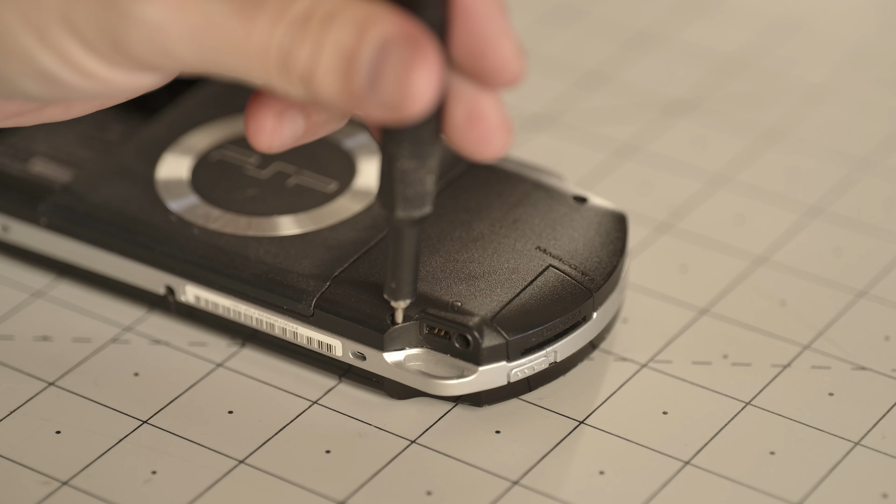The teardown is usually my favorite part of the builds, and this PSP is no exception. But I wasn't kidding when I said it's hard to find these things in really good shape. There are a ton of them for sale on eBay in lots of different models because they made a bunch of them over the years, but people kind of abuse these things.

I mean, think about it. Because of the form factor, people threw it in their pockets, threw it in their backpack with their keys, so you're never going to find a pristine screen unless you buy an aftermarket one, and you're going to probably find cracks in the case, and a lot of these aren't working.

When I start a project like this, I really don't know exactly what I'm going to do with it. Now, I have an end goal in mind, but how I get there and what it ends up looking like is still a really big unknown at this stage.

That's why you're going to see me taking a good amount of time to do things like preserve labels, categorize screws, and I even use the video footage that I shoot in order to understand how to deconstruct it so that I can put it back together again too.

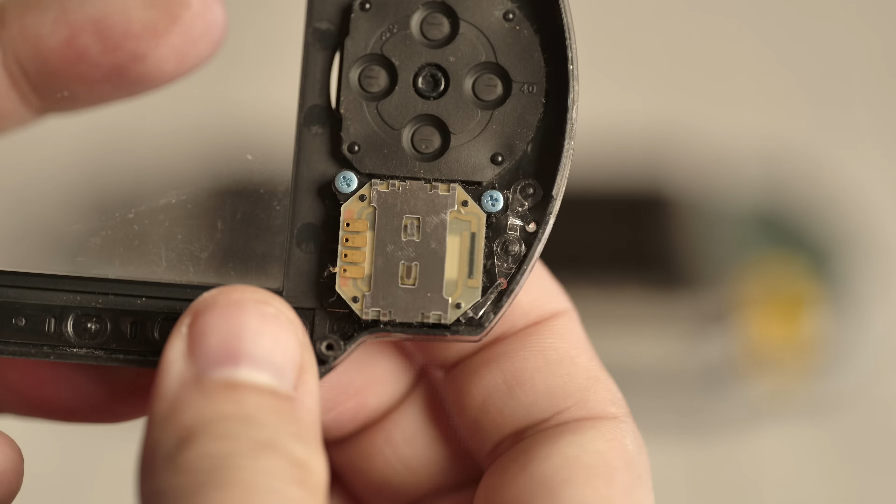I'm constantly referencing old footage. When you're tearing down something, if you think about it as not just a means to an end, then it becomes more of an archaeological dig almost.

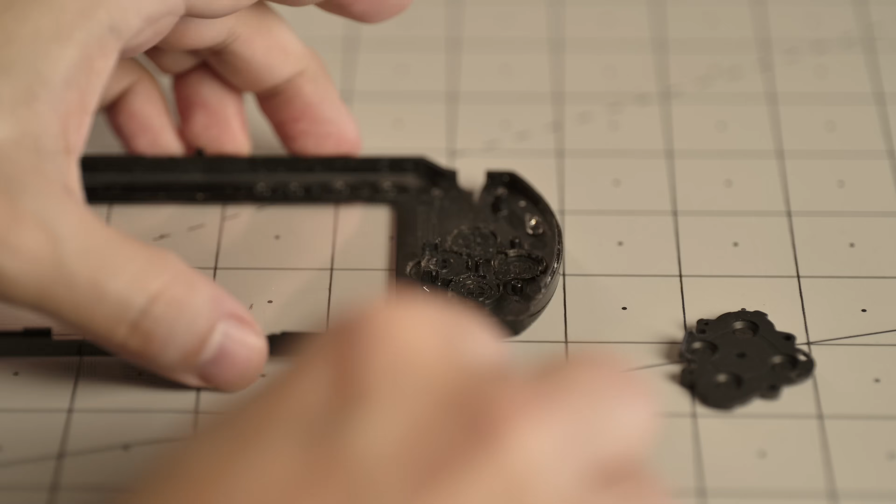You're really learning about how the industrial designers thought about how to construct it, put it back together, what their constraints were, what components to use, where to place the components, and you kind of get a cool look or a window into their mind when they were building the product in the first place.

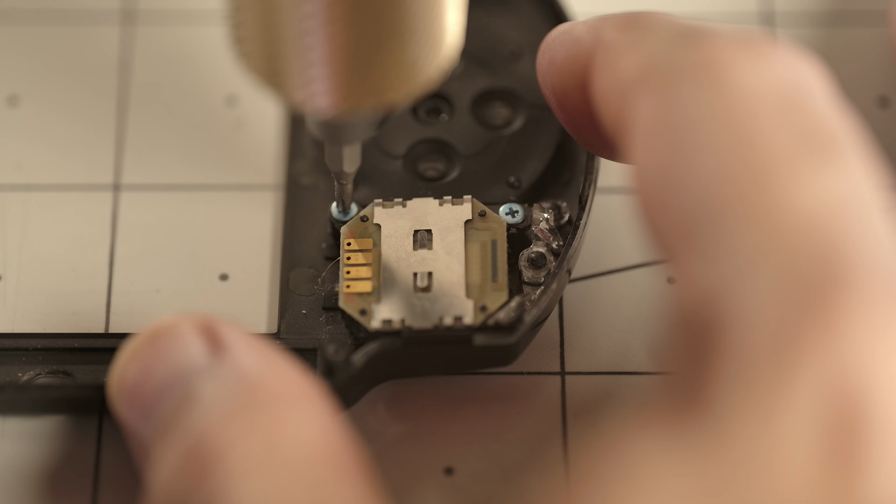As I'm working through this, I'm remembering that Sony was known for miniaturization. They had a history of miniaturizing products like radios and cassette decks back in the 80s and 90s, and this thing absolutely shows their chops.

One of the parts of the process is to make sure that I'm noting down all of the things that are broken or possibly missing. So I'm looking for pieces of plastic that it looks like something may have split off from, or some rails or posts.

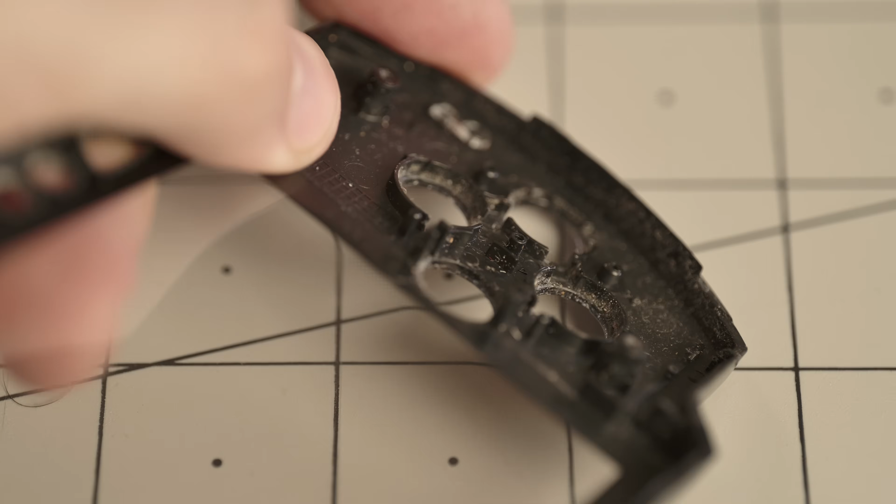Now, some of these it might not matter based on what I'm going to do and how I'm going to rebuild it, but some of it might, because it may be a pin that is holding down something that needs to be held down that maybe broke off over time. So I'm really taking my time, looking through all of the surfaces, all of the parts and pieces, and just being really methodical about it.

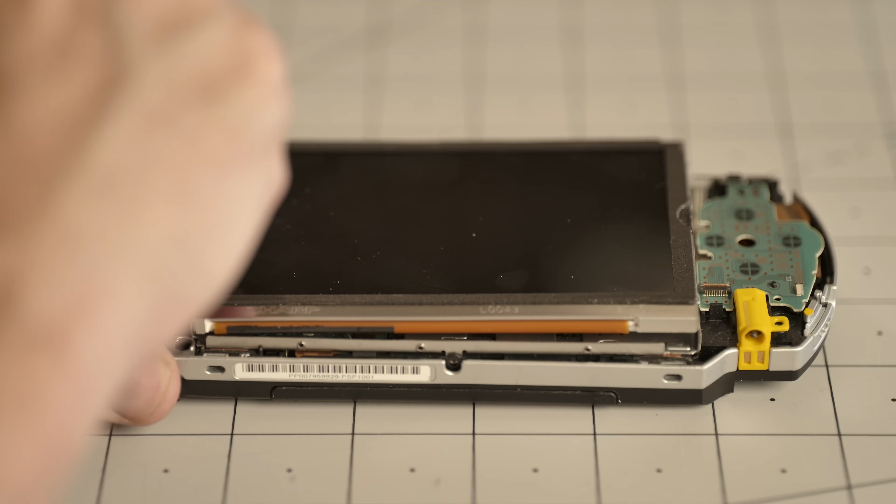Another thing that Sony was notorious for was not really designing for consistency in components as a leading principle. That's why you're going to find so many different connector types and screw types all over this thing.

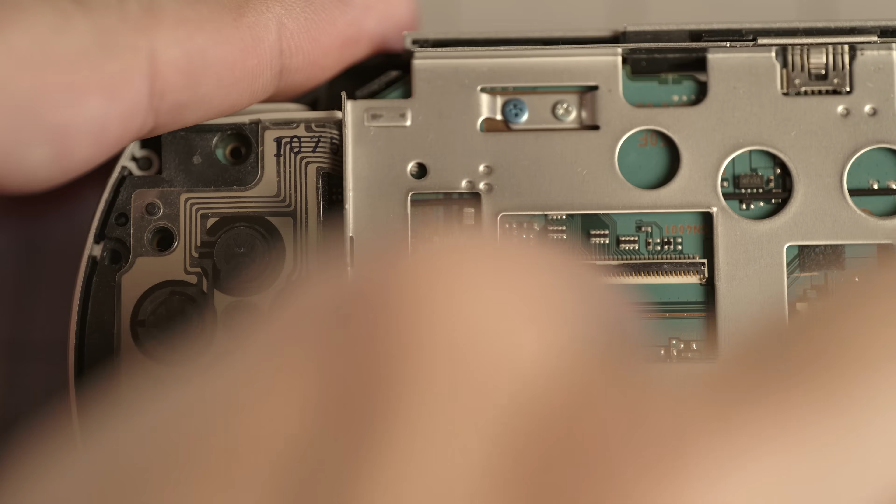This is just a guess, but I assume Sony's design philosophy was more about the right tool for the right job, rather than trying to get economies of scale by saying we need 5,000 or 500,000 of this one screw, so let's use it everywhere. It was all about what is right for the product at this point in order to get the best outcome.

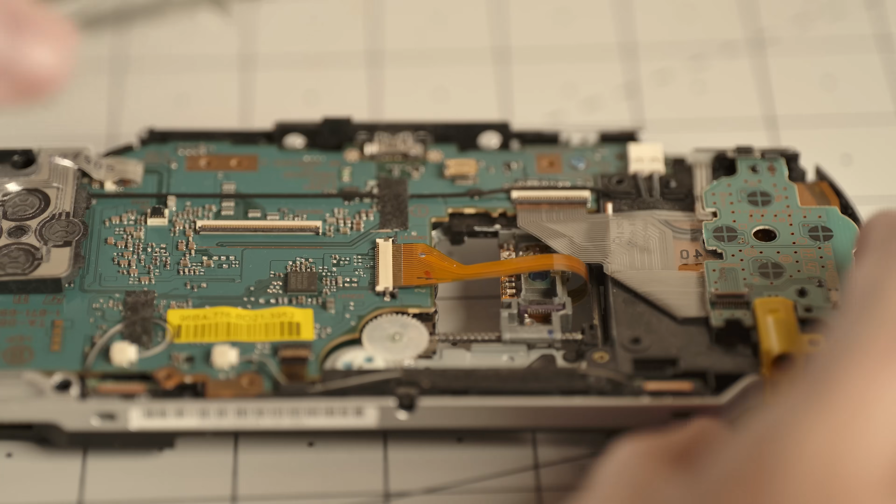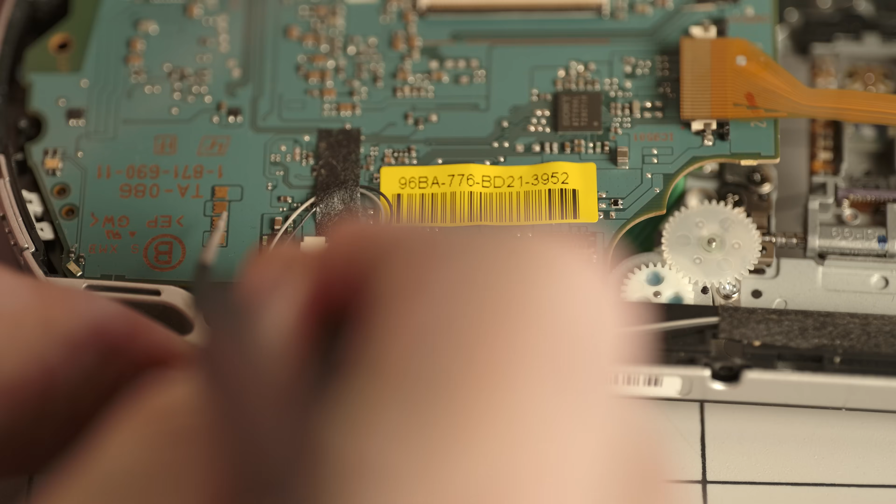What that also translates to for a company like Sony is proprietary parts, like that power connector we just saw. I'm going to want to standardize that by using something like a USB-C connector, so that nobody has to go on eBay or fish around for a power adapter that hasn't been made in decades.

As I get to the end of this process, it's really easy to get overwhelmed by the sheer number of components involved, but I need to remind myself that taking things step by step, one thing at a time, going back and referencing, it's all doable.

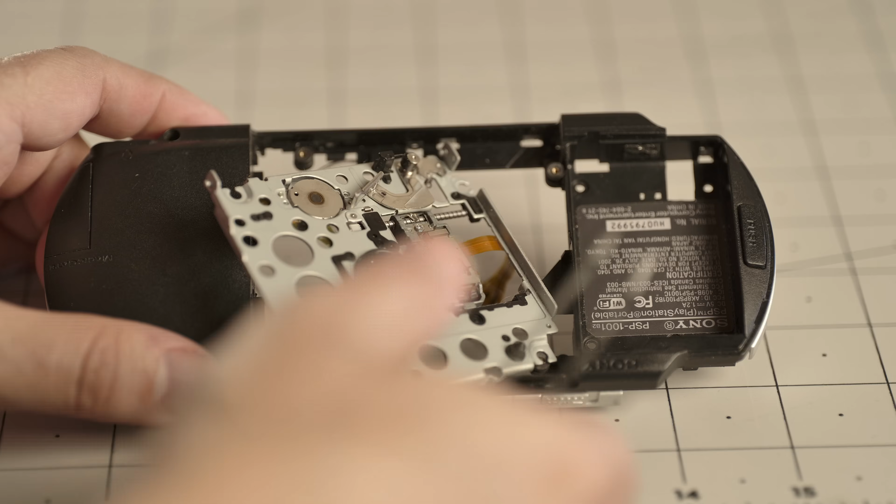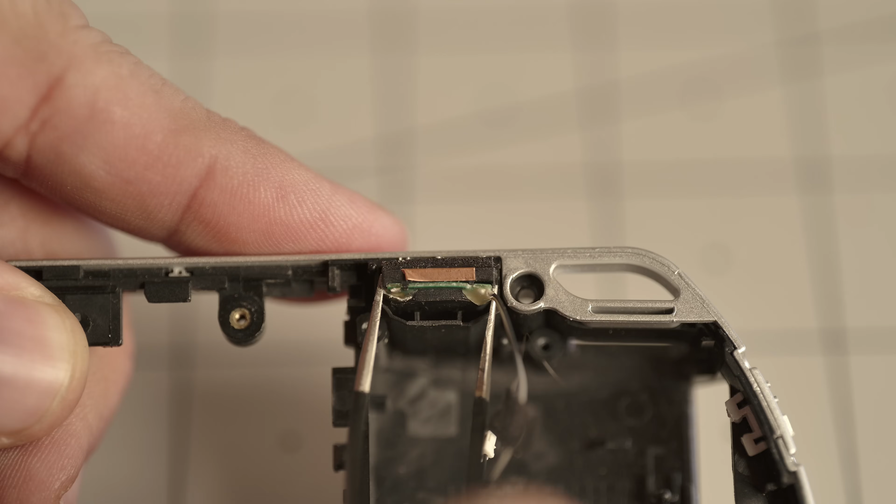The other thing to remember is that these are consumer-grade electronics. They were designed to be beat up, thrown around, and really put through the paces. I'm not going to design something like that. I'm designing something that is completely functional, but is more of a showpiece, more of a homage to the design. So there's a lot I'll be able to leave off by the end of it.

So with all the components taken apart, categorized, and put away, it's time to get to modeling.

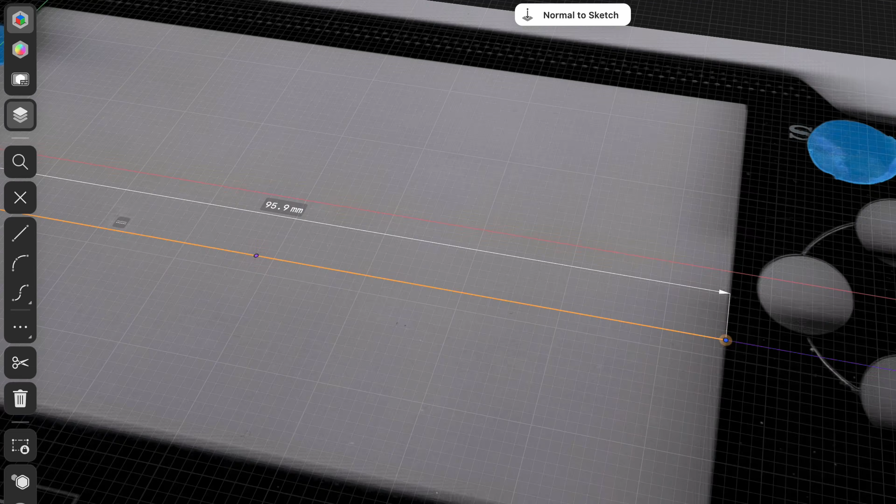Some might disagree, but I like to start off with photos and image scans. Now, a lot of you have been yelling at me for using 3D scanners for a long time, and we're actually going to get to that. I'm going to show that process in this video, but not just yet, and you'll soon find out why.

The very first thing I do is try to make basic shapes, to get an outline of the product, or at least parts of it, in order to understand the geometries of the overall thing I'm working with.

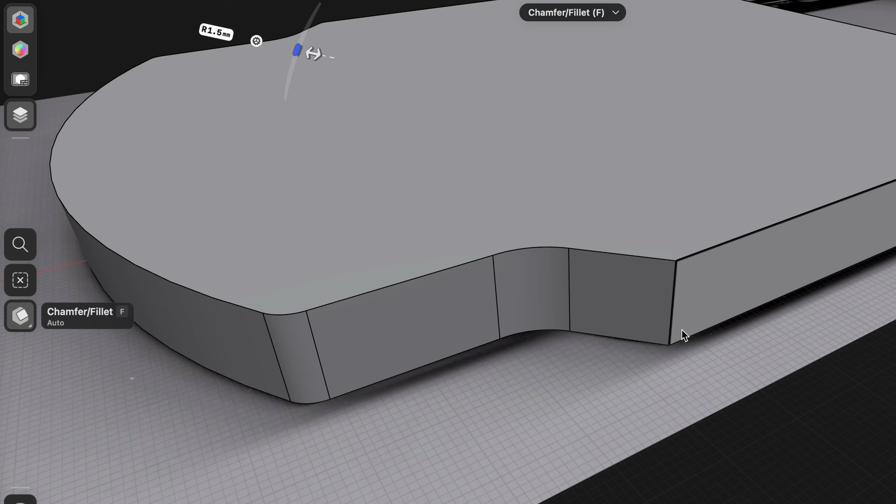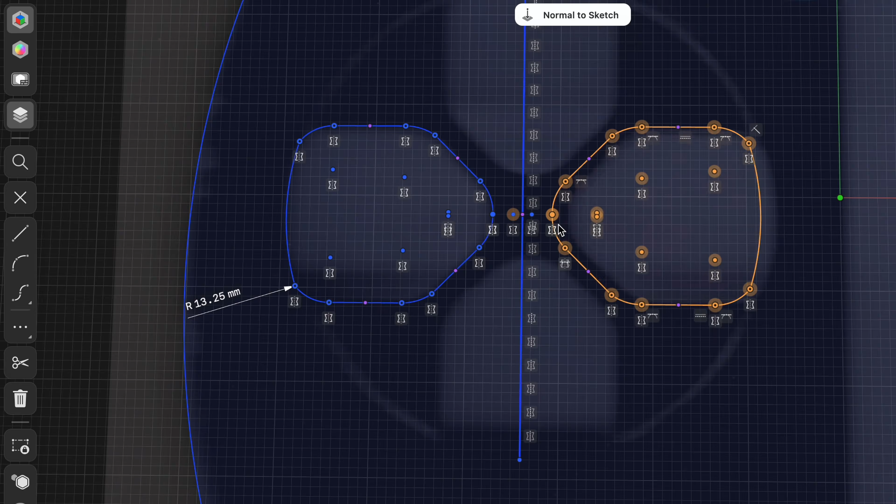Now I gotta say, it's a lot easier to work with 80s and 90s laptops because, well, they were boxy. There wasn't a lot of intricate geometry to them. This PSP is the first thing I've modeled for a case reproduction that has a huge amount of subtle organic curves, and I'm going to show you some techniques for how I deal with those.

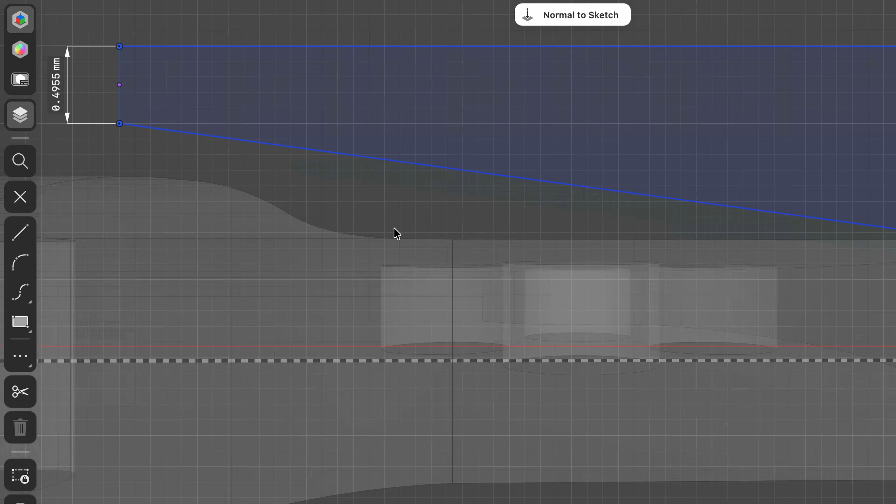Once I'm satisfied with the basic shape and the normal cutout holes, that's when I can take a look at the profile of the object and start to cut away at some of the more contoured designs around the sides. I use my tools to create nice organic curves based on measurements I've taken, and then start to take slices out of the side. I'll slowly carve away at all the side profiles of the device until I'm happy with the result.

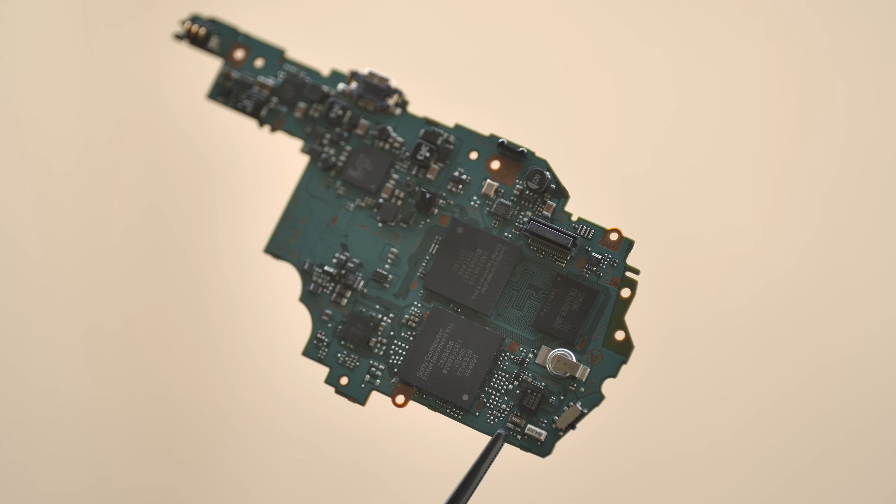Prototyping and modeling are kind of hand in hand. It's the same process, just different sides of it. This is the main board of the PSP, and I'm going to use it to help cut out the insides of the piece. So I need to know how it's going to sit within there, and the dimensions need to be perfect.

Now you're going to see me using this scanning spray, which is designed to sublimate over time, or essentially evaporate and disappear off the product without having to wash it. A lot of 3D scanners work best when products are white or at least non-reflective. The way these scanners work is to project a pattern onto an object, and if that object is reflective or dark, it absorbs too much light and the camera can't pick up the pattern correctly, so you get a bad scan and it has trouble mapping the object in 3D space.

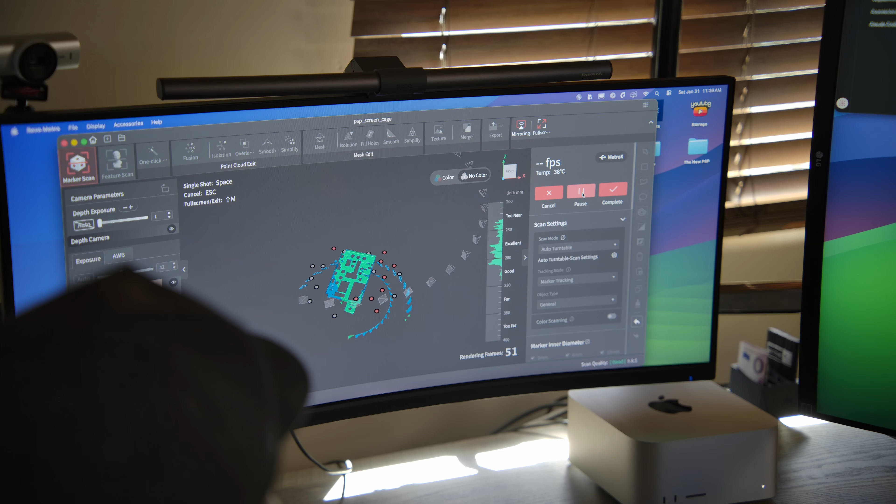And what can I say? Some sprays sublimate better than others. Actually, this is just my own impatience.

Now, at the end of the scan, you're not actually left with a solid object itself. It's a detailed point cloud, and if we zoom in, you can see the individual dots.

I'm going to continue to repeat this process, and not just for the things that I want to model, but for everything that I need to put inside the case to make sure that everything fits when it's all said and done.

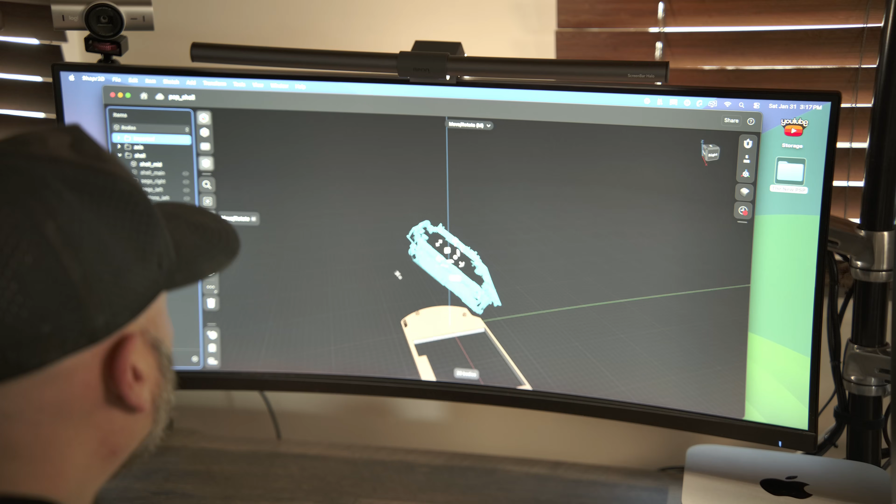So here you can see what one of those models looks like from the 3D scan, and I need to level it out and position it pretty much over top of my basic model that I made from the image scans.

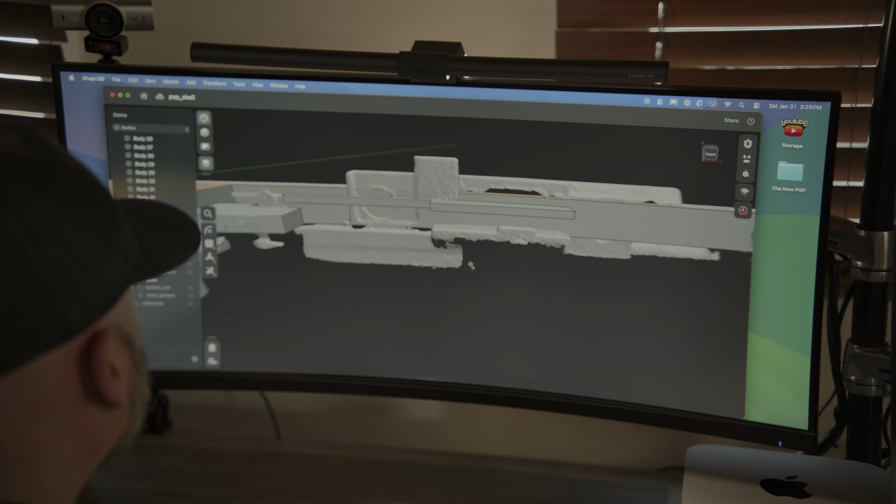When you model an object from scratch, you define lines and surfaces and holes that you can push and pull and change the dimensions. You can't really do that in one of these models generated from a scan, so it's much easier to use it as a reference on your own model to make sure to get the dimensions right and that you have all of the features.

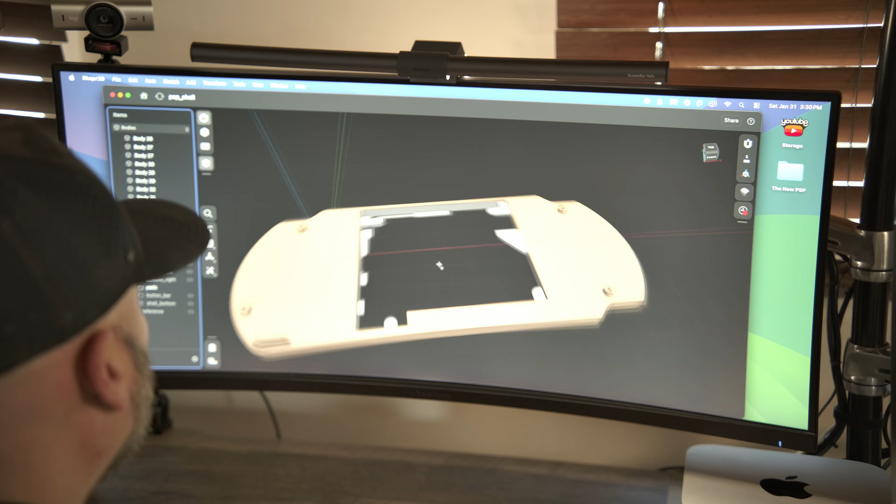So now you can probably see how this would be overkill for something that's basic, but for an object like this that has all of these tabs and cutouts and holes and standoffs, it would have taken me a huge amount of time to be able to do this just with a pair of calipers.

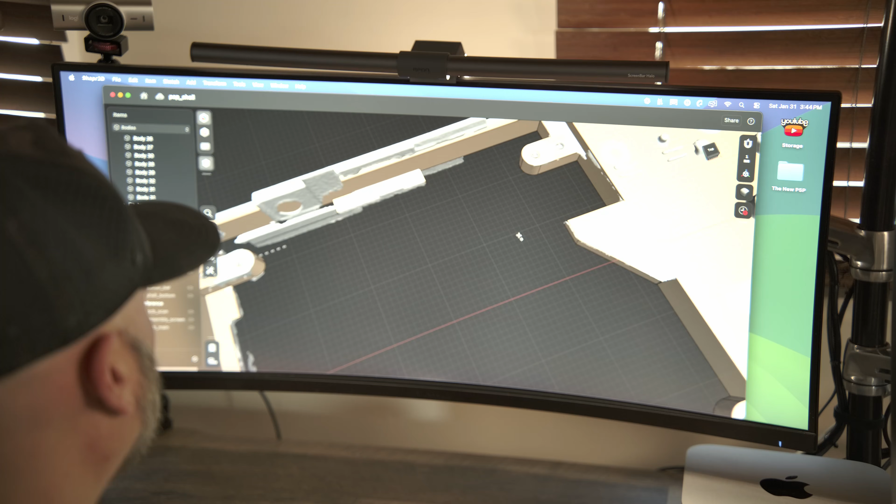Now, when I get a model to a place where I want to test fit something, usually I'm trying to fit a specific thing like that PCB, or maybe it's a battery or something else. But when I'm ready, I'll just send it off to the printer and then start to work on something else.

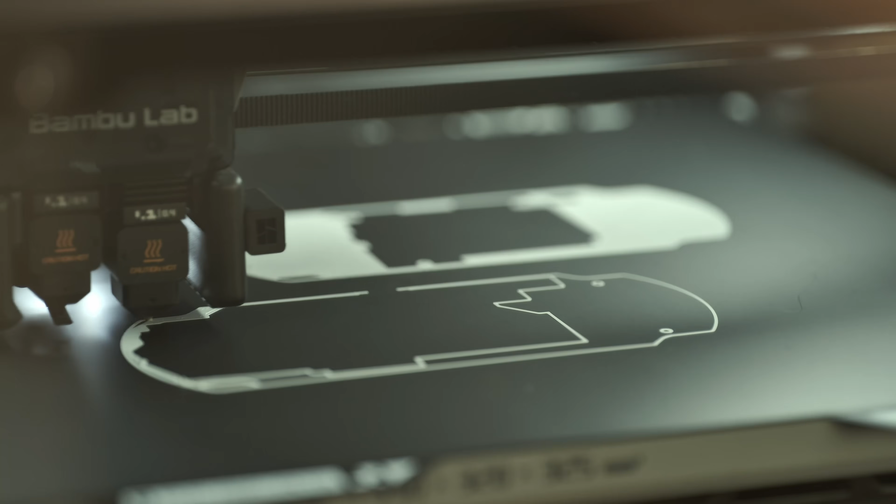I'll generally have one thing that's always printing and then working on a separate model. Then when that one's done printing and I can test fit and know what I need to change, I'll just switch it up. So always something printing, always something modeling. It's rapid prototyping at its finest.

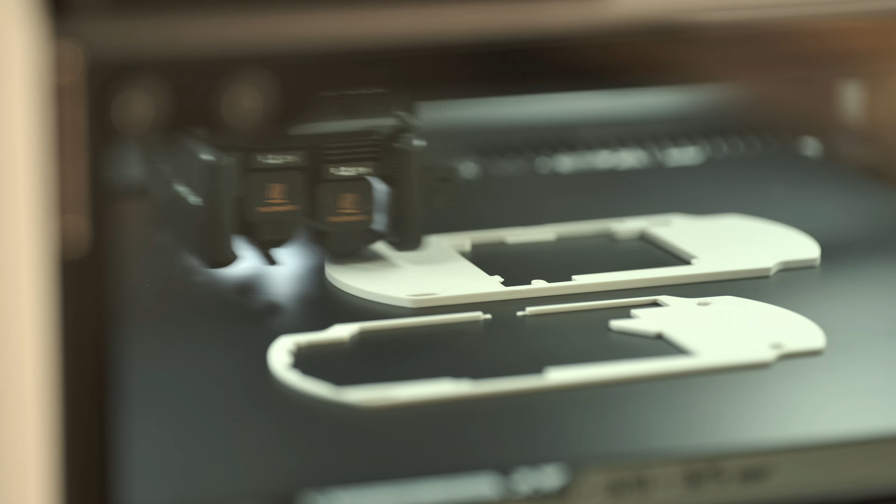It's kind of crazy how much I use my 3D printers, even when I'm making something where the end result is not going to be 3D printed, it is still a very crucial part of my process. I use it all the time.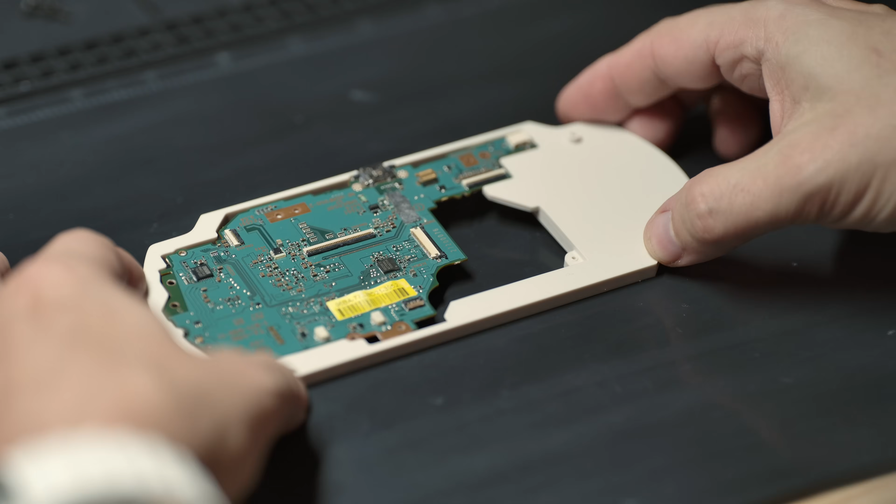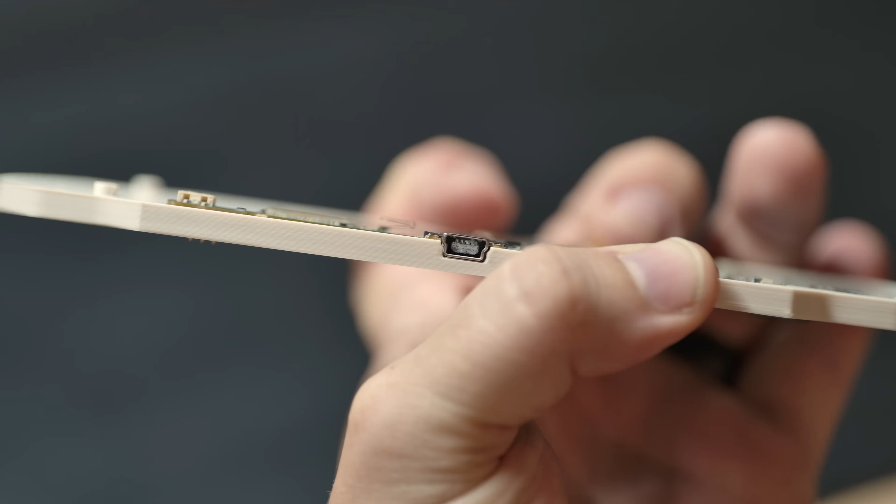And because it's so quick, I will probably want to get something out way before I've modeled all of the things that I know I need to in order to do a test fit. So what I'll do is, for example, I'll take this PCB, I'll lay in the basic stuff, but I already know that there are holes and cutouts that I haven't even modeled yet.

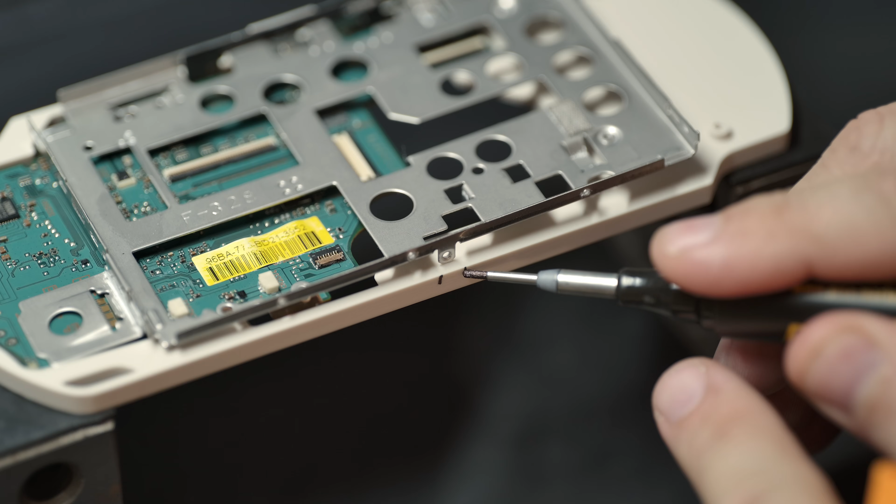But what I'm going to do is actually take marks on the physical object itself and then use those to measure distances and things like that. I know it seems a little counterintuitive because I actually have the fully scanned 3D model, but there's absolutely something to be said for working off both a digital object and the physical object when it's actually sitting in front of you.

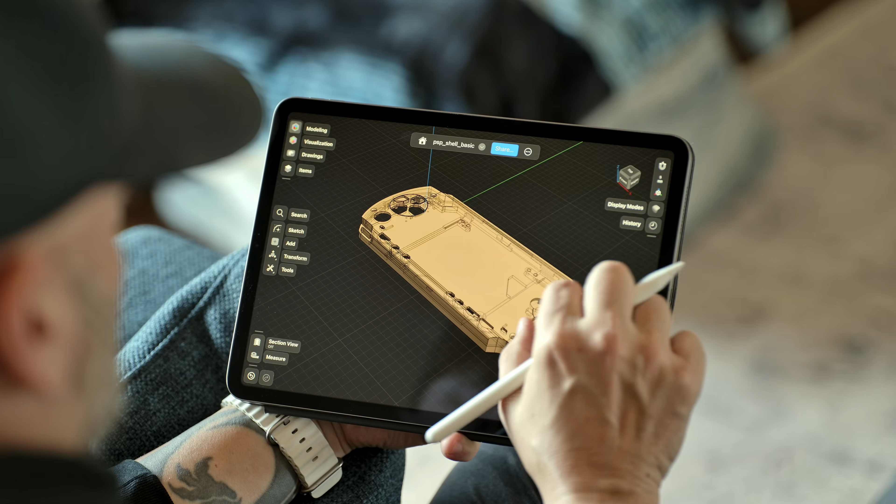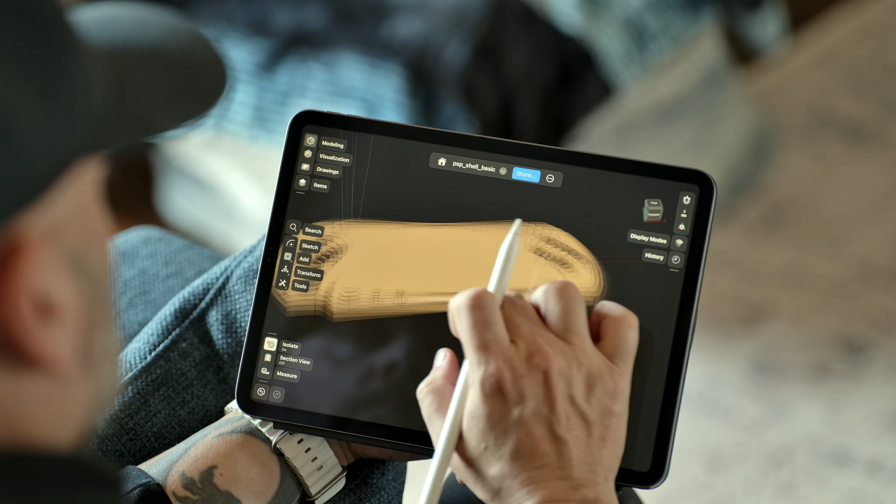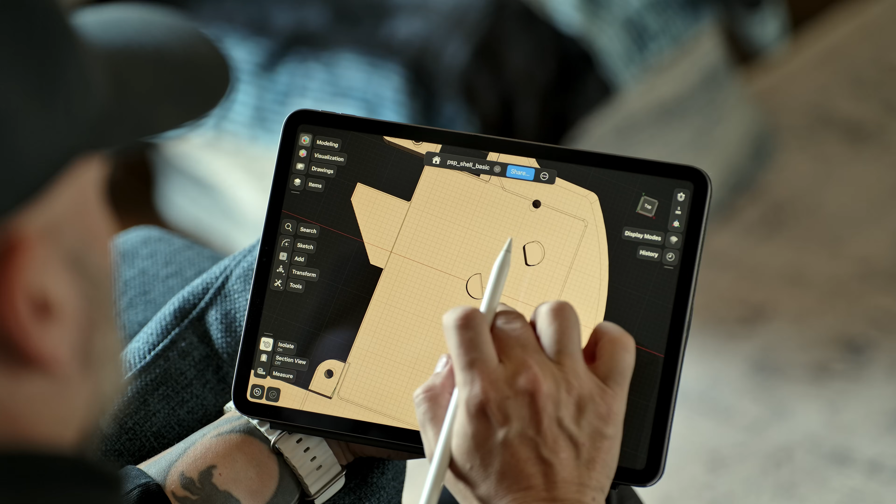And it's about this time in the modeling process where things start to look really good and I start to get excited again. There's a little bit of a lull in my excitement of a project when you're really just in the details, but when things start to come together and you start looking at a fully realized digital object that you know you're going to be able to hold in your hand, it gets kind of exciting after that.

Here's where things go off the rails, and kind of on purpose, but hear me out. Remember that proprietary power jack and how I said I wanted to replace it with a USB-C connector? Well, this is it. I know I don't have to draw up my own schematic and mill out a custom PCB on my CNC machine, and I know there are a ton of USB-C power delivery boards you could buy off Amazon or eBay or a ton of other places, but I want to.

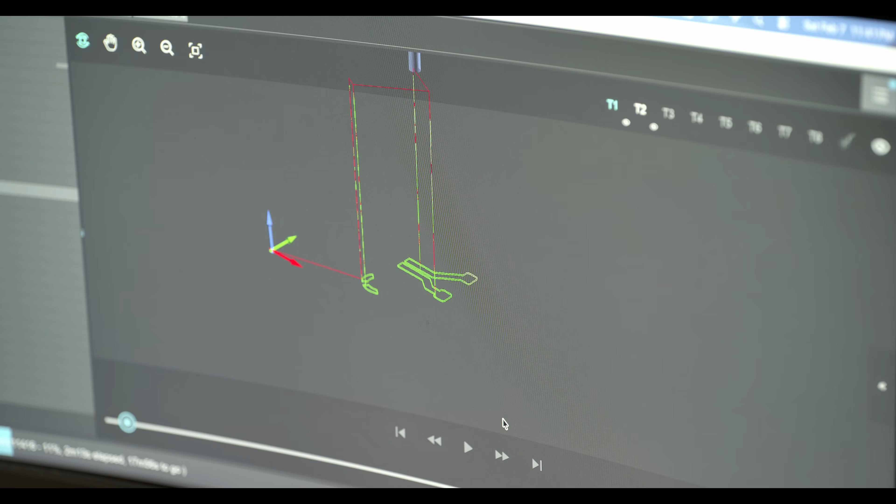And that's how I learn. Now, admittedly, even in this little project, I still try to go overboard and push the limits.

Ultimately, what we're looking for here is 5 volts, and you can do that by drawing up an incredibly simple diagram with 2 resistors. The first steps are to mill out the traces and then drill the holes.

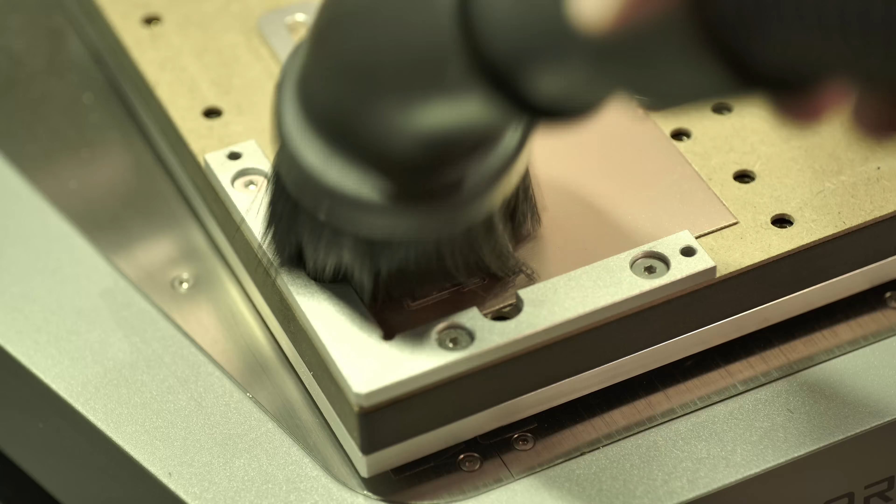Then you come in with a multimeter to make sure that all of the things you want connected are, and the things you don't want connected aren't.

After that, you need to apply solder mask. This helps protect the copper from oxidizing, but it also forms a boundary layer to help guide the solder on what to stick to and what not to.

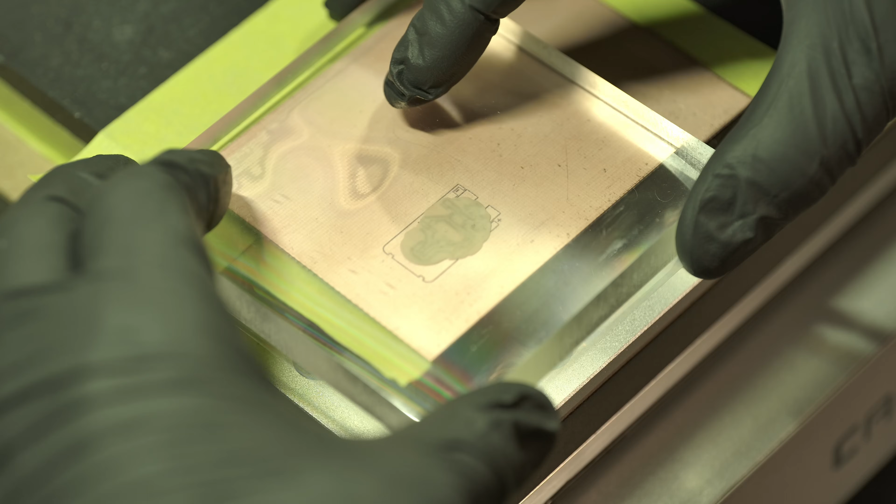And I like to add a little flair. So instead of using a basic sheet of film to help cure the mask, I'm going to use a piece of film that has a diffraction grating applied to it. This grating splits light into its component colors, kind of like a flat prism. It has the side effect of making things look super cool. Fun fact: this texture can be imparted onto anything from chocolate to PCBs.

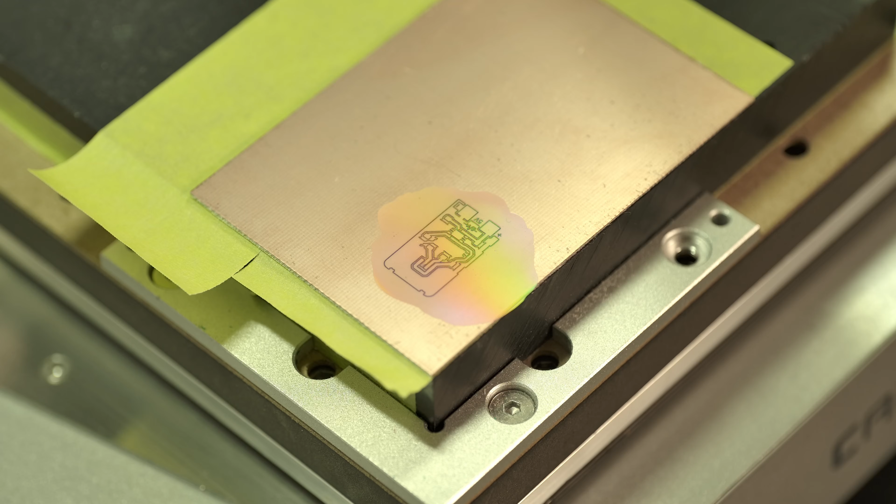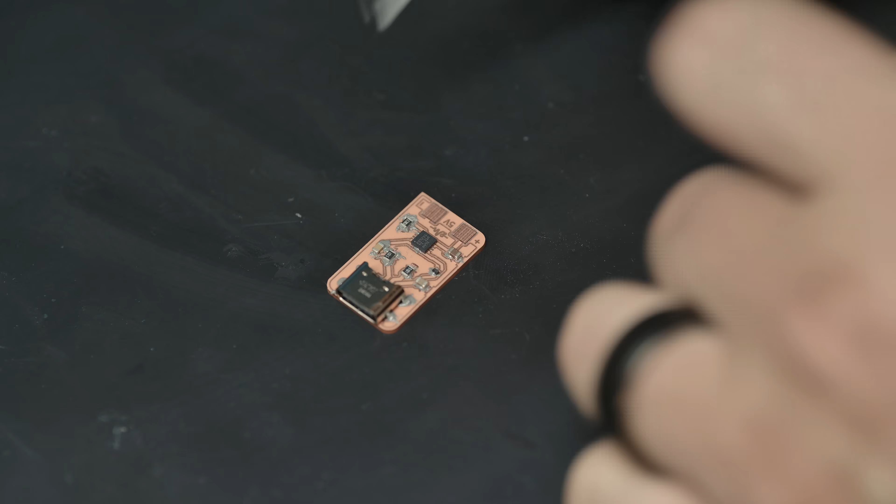Now you may have noticed that my PCB got a little bit more complex than the 2 resistors. These components are incredibly small, and I don't know too many people that actually prototype their own PCBs with these kinds of surface mount components, but can't blame a guy for trying. They seem to solder okay on my hot plate, but after testing, I couldn't believe that they actually worked.

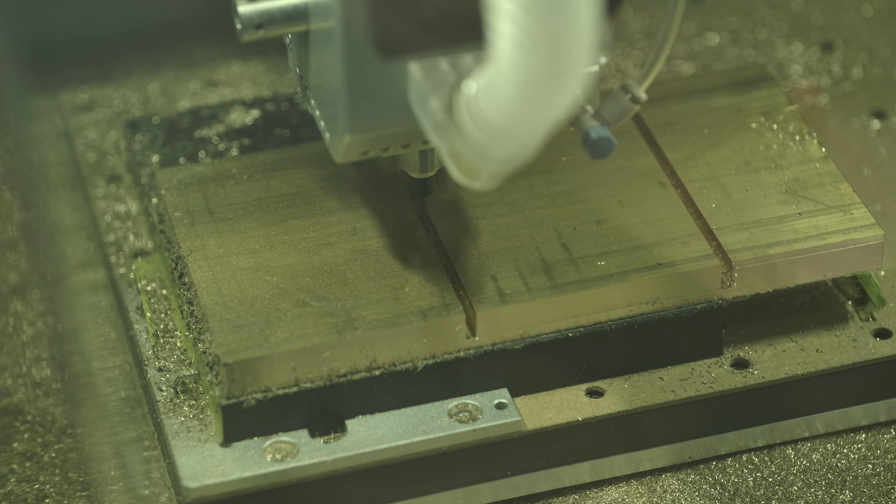With modern technology, it's actually quite easy to get the basics down for CNC machining and start producing some parts. But as you get more advanced and want to do more, things get exponentially more complicated.

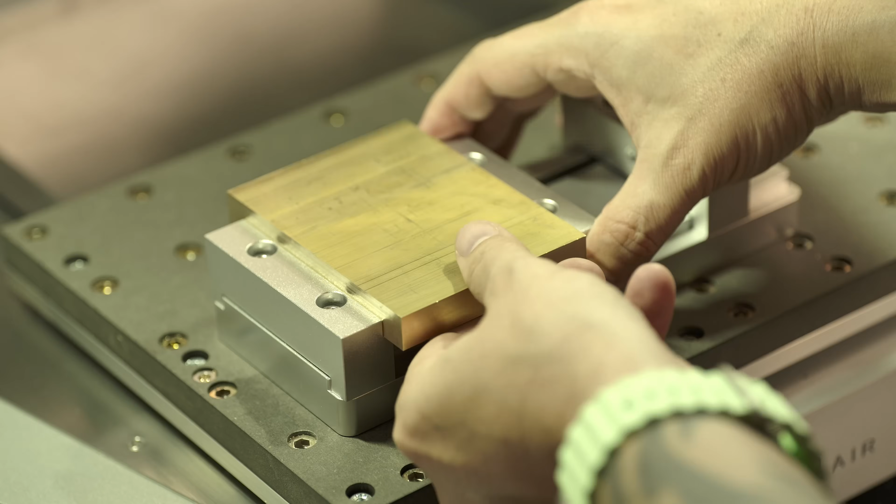If you're only doing one operation or machining one side of a part, you can often get away with your stock not being completely square. But when you need to flip it, things tend to get a little bit more complicated. Oh, and don't mind my broken end mills - there's going to be a few of these while I get to know the material.

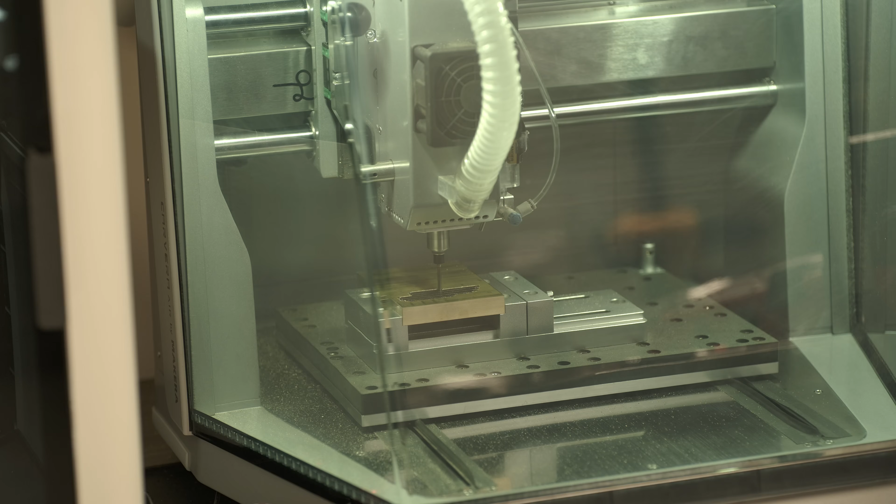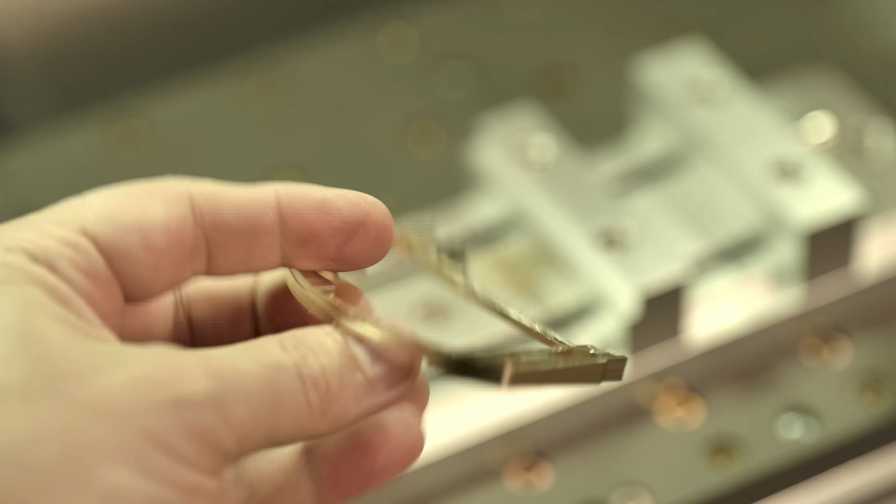I've really taken to machining because it's almost like the opposite of 3D printing. Well, actually it is opposite. While 3D printing is an additive process, machining is subtractive. You're removing material away in order to get the part that you want.

And it comes with its own unique challenges. There's not really a lot of software where you can just upload a model and the CNC mill cuts it out. It's an iterative process with multiple operations. You cut away a little bit, cut away a little more, break some more end mills, par for the course. I think that because it's a more manual process, the resulting parts are just a lot more rewarding.

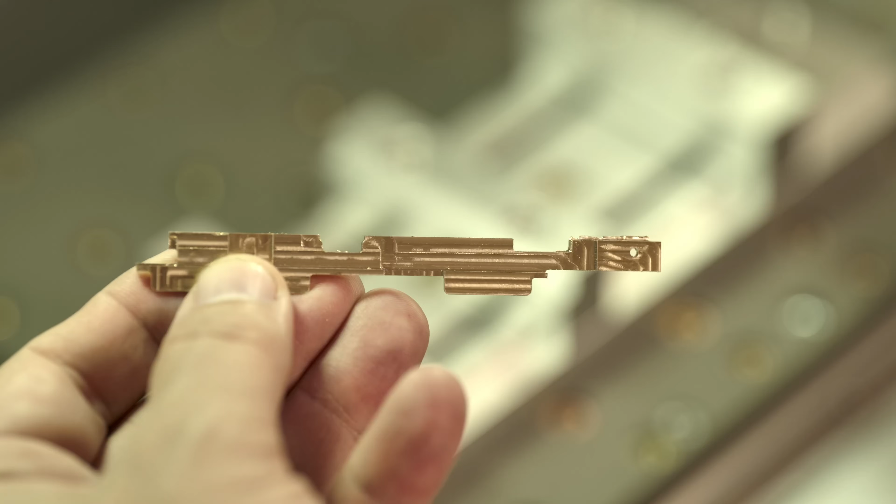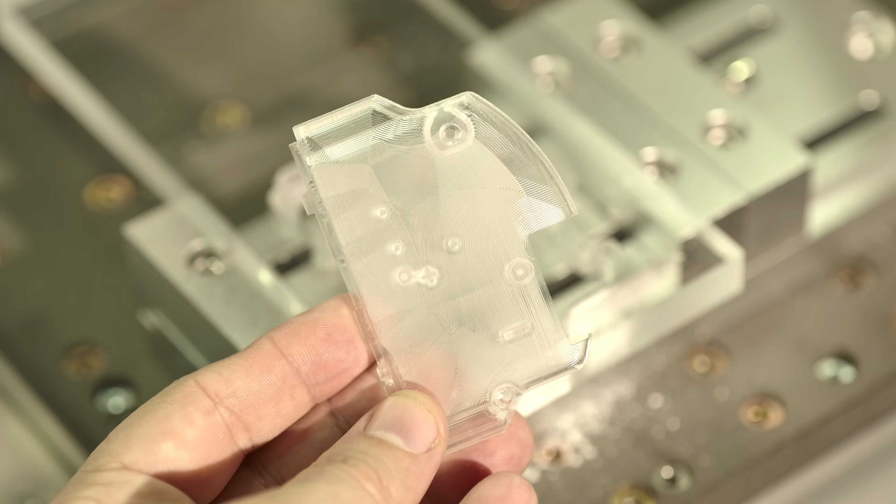Now, you'll notice along the way that I've broken up the models into multiple pieces. I've done this for multiple reasons. The first is that this is an expensive process, both from a time and materials perspective. If I were to be 10 hours and multiple operations into one piece and screw it up, that's a lot of wasted time and money.

So I guess you could say I'm hedging my bets. The other reason is I really want this thing to look handmade, and so I'm building this in a way where I'm going to use brass screws to kind of put it all together.

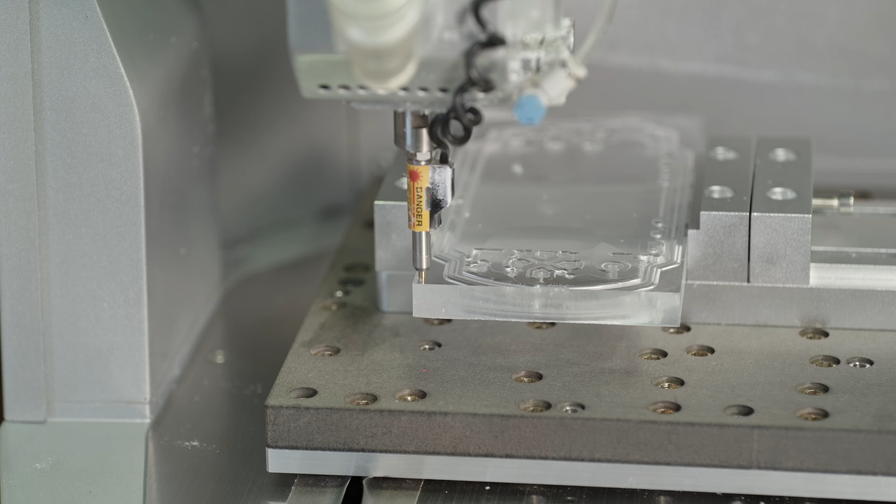I've developed a love-hate relationship with machining cast acrylic. It is absolutely beautiful but frustrating at the same time. Unfortunately, there's quite a bit of cast acrylic that's in the parts graveyard right now, but when it comes out good, man does it look good.

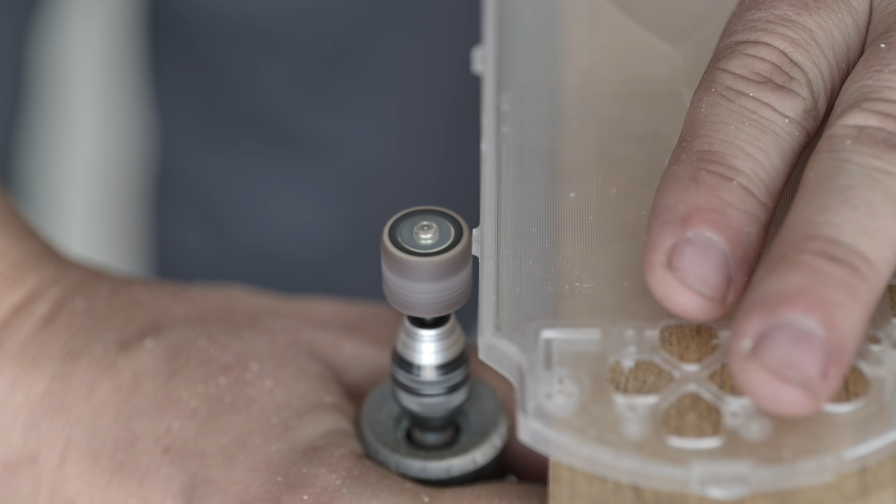Now I've done my finishing passes with a ball end mill that gives it this really cool texture, but that means I've got quite a lot of work to do in order to get it clear enough to be a functioning screen.

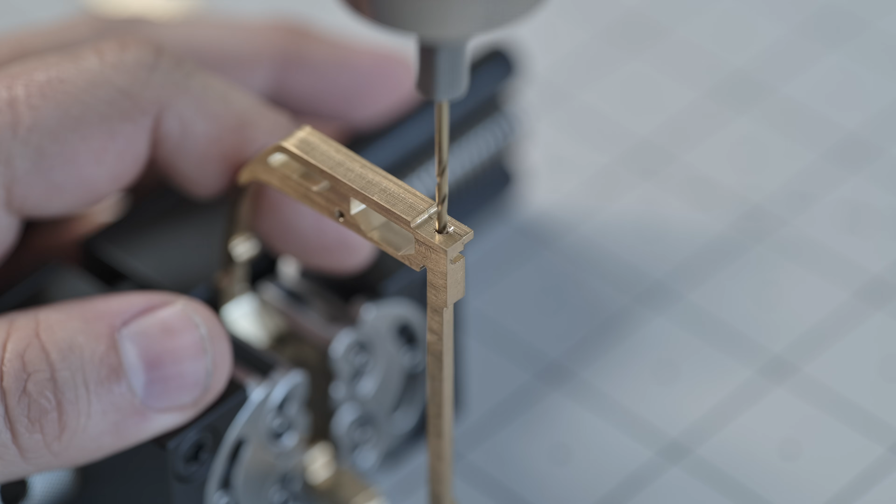I gotta say, I was pretty proud of myself breaking up the part into multiple pieces, but what I didn't plan on was integration hell. I'd inadvertently upped the level of complexity of the design tenfold. Well, okay, maybe not tenfold, but it sure seemed like it at the end of it.

Getting all the parts to fit together nicely, screwing and tapping and filing took a long time, a lot more than I'd planned. I also wanted it to look a certain way, which meant countersunk screws.

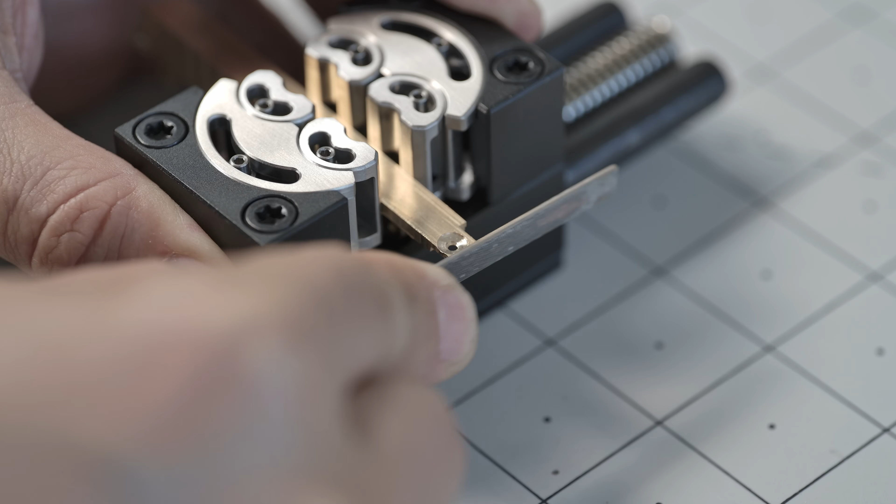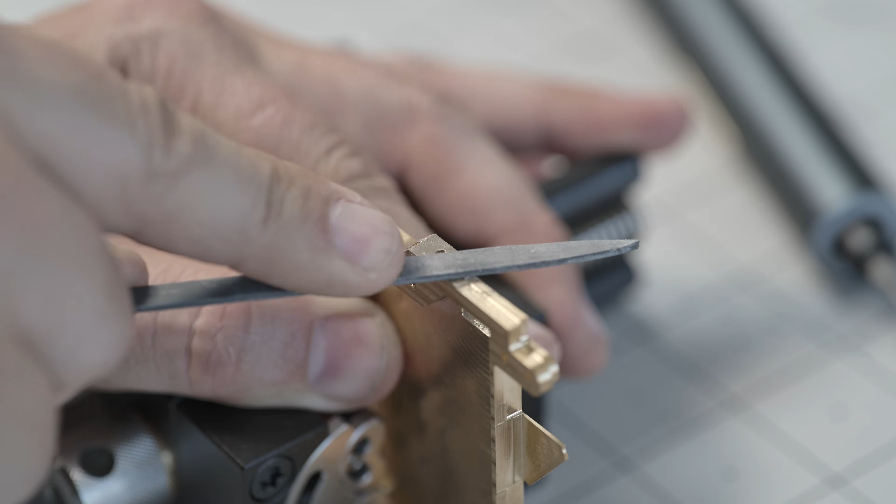Now, I know in the comments I'm going to get asked, why didn't I do this in the CNC? Let's put it this way, 2 operations, front and back, were more than enough for my level of skill and patience right now, so I decided to do the 3rd operation manually.

Once all was said and done, it looked really good. At this point in the project, I'm about 4 months in. Now, I am only working on this nights and weekends, and there was a studio move in there too, but seeing it all come together like this felt really good.

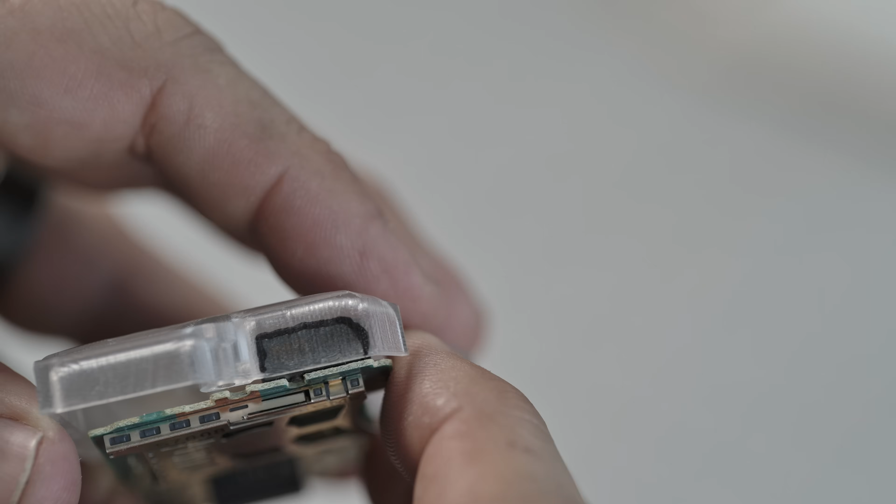And it almost made me forget about how much more there was still to do. And to be honest, there's another part of me that dreads fit testing. Because when you put all the pieces together, it becomes glaringly obvious about all the work that you still have ahead of you. The satisfaction of holding a somewhat finished part in your hand goes away pretty quick, and then it's back to work.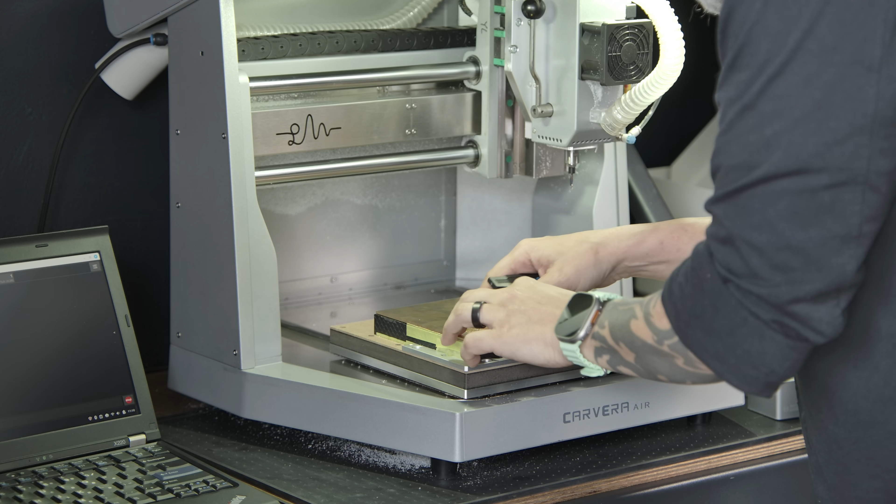In the beginning of the video, I mentioned that I didn't really know what I was going to do until I got there, and that's kind of a superpower. Because I'm making this for myself, I can delay decisions until right before I'm about to make something, like, do I actually mill out the back in brass, or do I mill it out in cast acrylic and then add a brass ring?

Now, it may seem a little chaotic, but this kind of decision-making process is a lot less stressful than having a whole plan ahead of time and then needing to change it midstream.

You learn as you go, and the process has built in the ability to adapt because you actually haven't made the decision yet. And look, if this hadn't have worked, I could have gone in a different direction, but the fact that it did is just another checkbox.

Coming to the end of a long project is a little bittersweet. On one hand, I'm ready for it to be done. I'm ready for my tools to be cleaned up and on to the next thing that I've probably been thinking about for the last month.

On the other hand, these are the kind of times when I can just sit back and reflect while I'm sanding for what seems like hours. I look back and reflect on the skills that I've honed, the tools that I've used, and the fact that I can't wait to show this thing off.

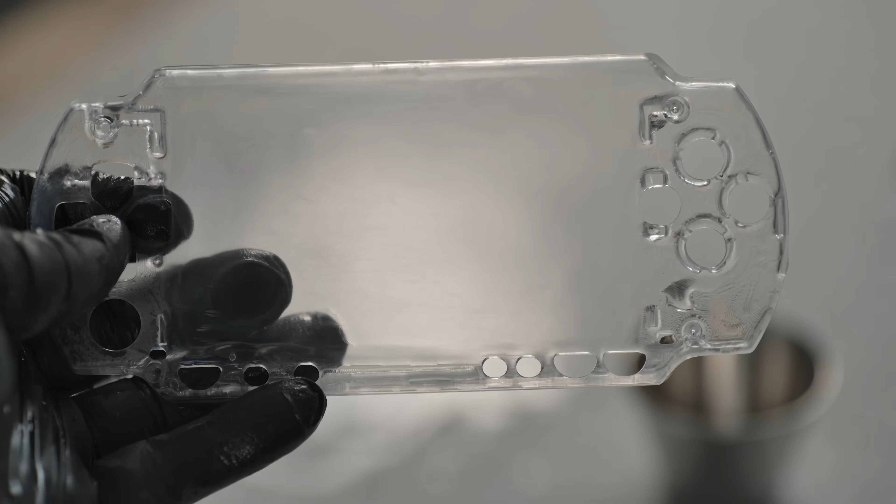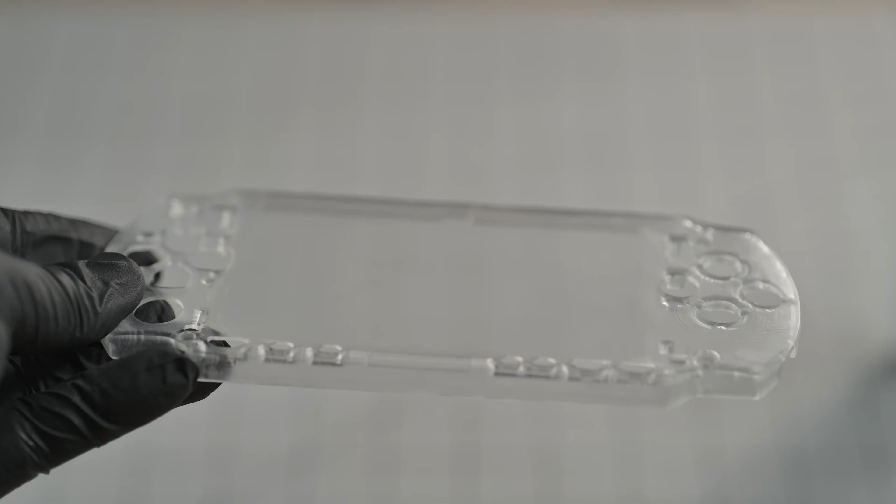I'm probably delirious and getting too deep here since I'm doing my voiceover at midnight, but sanding is a really good metaphor for learning. Each layer you sand down, each grit that you use is forming a really solid base for what comes next. Stepping up a couple hundred grit at a time and finishing with this acrylic polish, I was actually really amazed at the optical clarity I was able to get out of a CNC'd part.

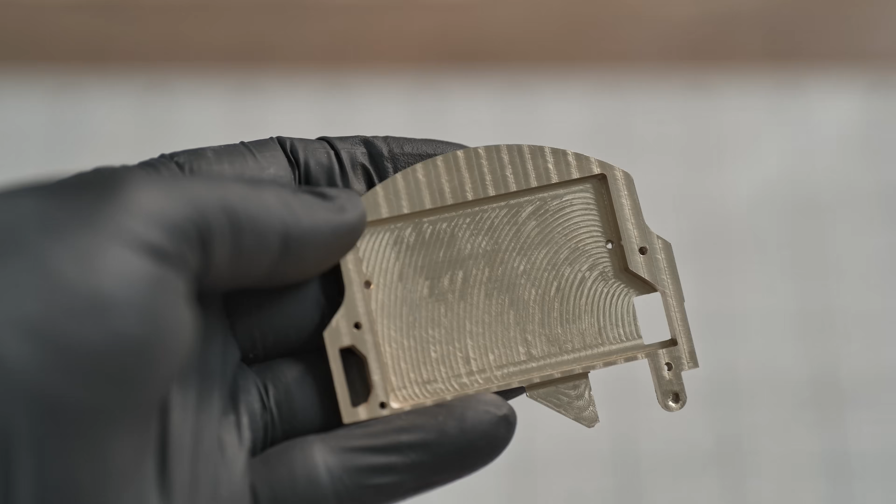And speaking of polish, there's more to do on the brass side. Brass begins to oxidize the moment it touches the air, so right after machining, things start to get dull. The best thing I've found to bring it back is, honestly, a little Bar Keepers Friend. Giving it a gentle scrub with a soft brush and water, it has enough abrasive to remove that oxidation, but you need to seal it pretty much immediately afterwards. And to do so, I swear by this wax. The microcrystalline structure means it's dense and a lot less permeable to air and water, acting as a really good sealant. It's also reversible and optically invisible, letting the material's shine come through.

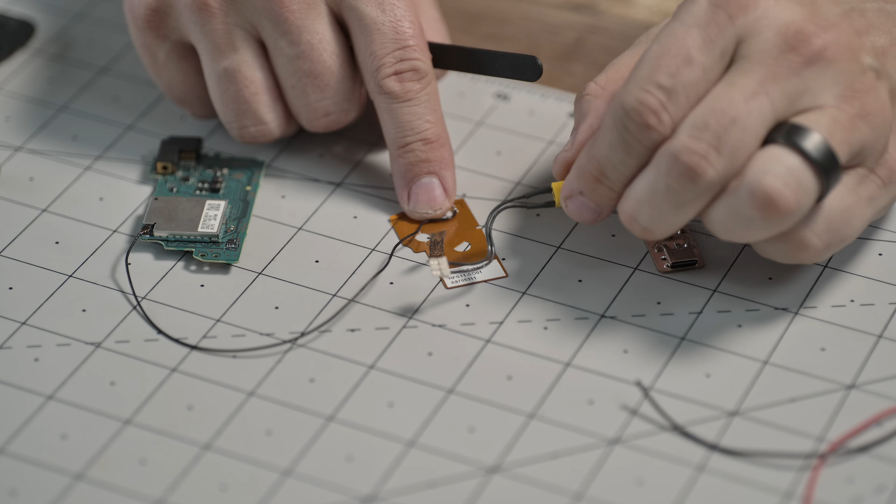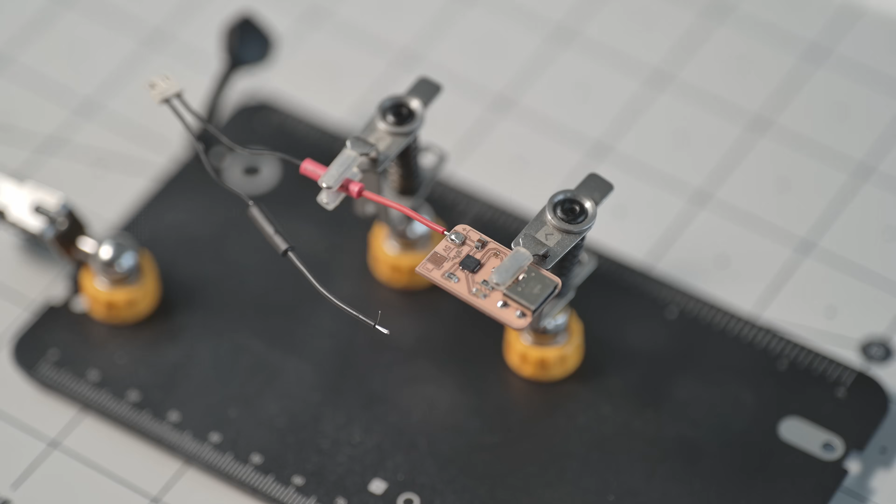And now to deal with our power plug. You may have noticed that I CNC'd a notch inside the brass that the power board can fit snugly in, but before we do that, we need to connect it to the original power cable. And since it's going to be sitting in conductive material, we need to make sure that nothing is shorted out.

And now this is when we get to the fun part - having all of the pieces knolled and laid out in front of you, and assembling it like a kit that you just picked up from a model shop. Now, this is actually the first time I'm putting this all together. Of course, I've done fit testing on a lot of the components, but when it all comes together, there's lots of things that could go wrong. And yeah, there were one or two issues I'll talk about later, but for the most part, this thing turned out fantastic.

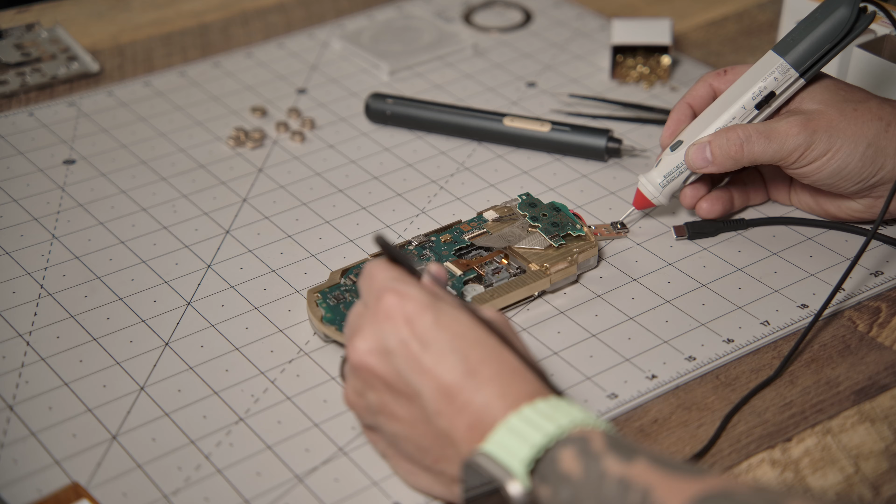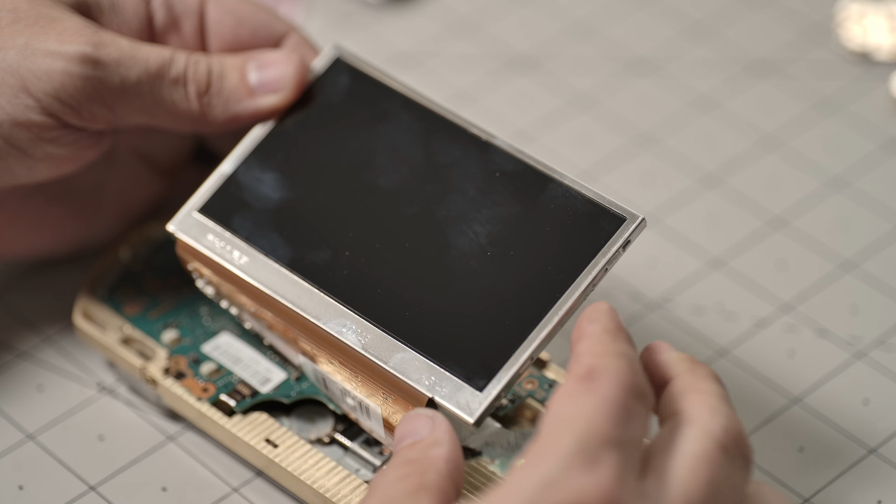One of the big concerns I had was ground loops. When I screwed all of the PCBs into the board, I needed to make sure the ground loops were preserved. When designing a PCB, sometimes there are ground planes that are purposefully separated, and if those ground loops were shorted together by, I don't know, putting it in a brass case, that could create issues with the sound, video, and sometimes even data transfer. Luckily, it seems like I dodged a bullet because this board just had one common ground. So when I powered it up for the first time, it came to life.

Well, here we are, and after that, this thing looks absolutely sick. The brass looks incredible - it looks almost like a handmade jewelry piece. The cast acrylic, the way it was machined, looks really, really cool, and I was actually able to get a pretty good optical clarity as I was polishing it up.

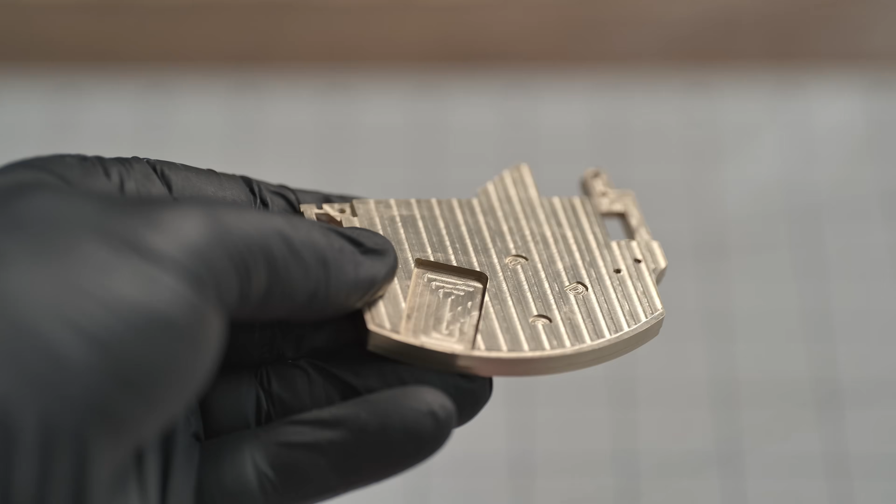Now, this thing is not flawless. There are some issues with this that I'm going to address. First off, I completely forgot about the top bumper buttons, so we're going to have to do that. The second thing is where the USB-C port is supposed to be, it's not there right now. That's because I didn't take into account enough space for the power button to bump up against the USB-C connector. So that's something else we're going to have to take care of.

One other thing to note is that this is a milestone video for me. This is the first project I did after passing 100,000 subscribers and in my new studio. There's a lot more space and a lot more things I can do that really help with my creative process and are going to help me make more videos and release them more often.